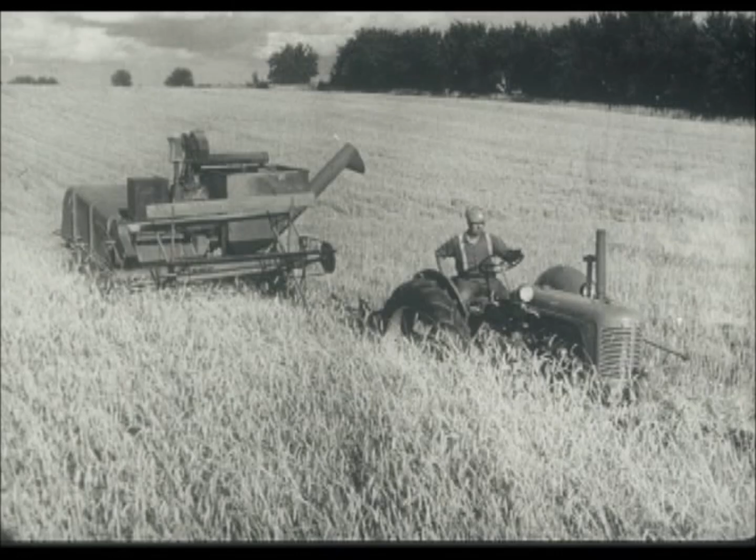A bumper crop and a good job of combining - that's the kind of harvest every farmer should have every year in every threshable crop. That kind of harvest means clean grain in the bag or bin, a quick harvest free from crop-wasting delay. It means high-testing grains or seeds, top market price, bigger returns with lower harvesting costs. Good harvesting begins for you when the right size and type of combine arrives at your farm.

This 6-foot machine is designed for heavy service. It's a model that has set a record for outstanding performance in harvest fields around the world. Your dealer or his specially trained serviceman can show you how to get the same performance for every threshable crop on your farm, whether you're a threshing expert or not.

When your combine is delivered, your dealer will ask you to sign the dealer's combine delivery service report. It serves as a checklist for him and as assurance to you that he has done a thorough job of pre-delivery service. This instruction book will answer all your questions once your dealer has acquainted you with a few basic facts and how to apply them.

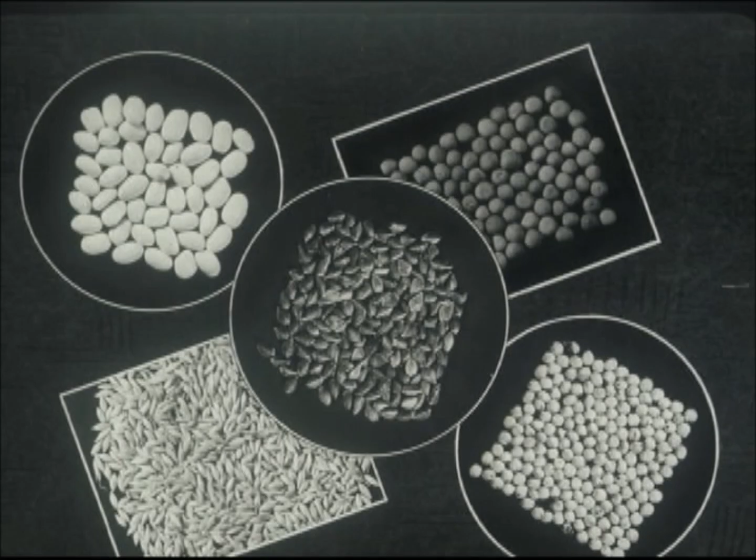Seeds in every size, weight, and every type of head or pod have been harvested by this machine from more crops than you'd imagine - short and tall, bushy and slender. Most threshable crops the world over can be divided into 7 groups. If you know how to handle one of each, you can handle them all, whether the total number is 10 or 100. First, we have regular grains: wheat, barley, oats, rye.

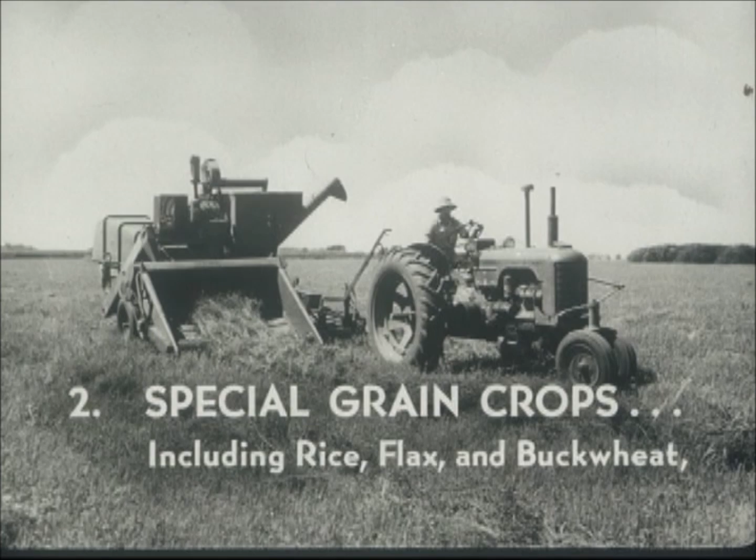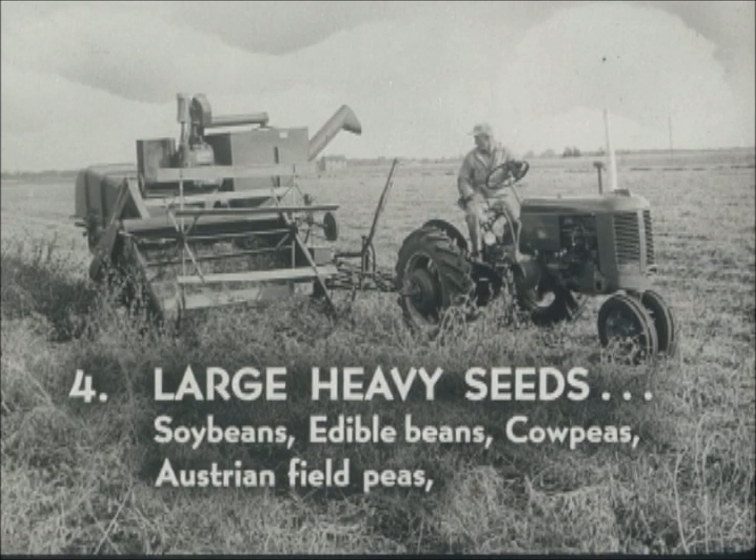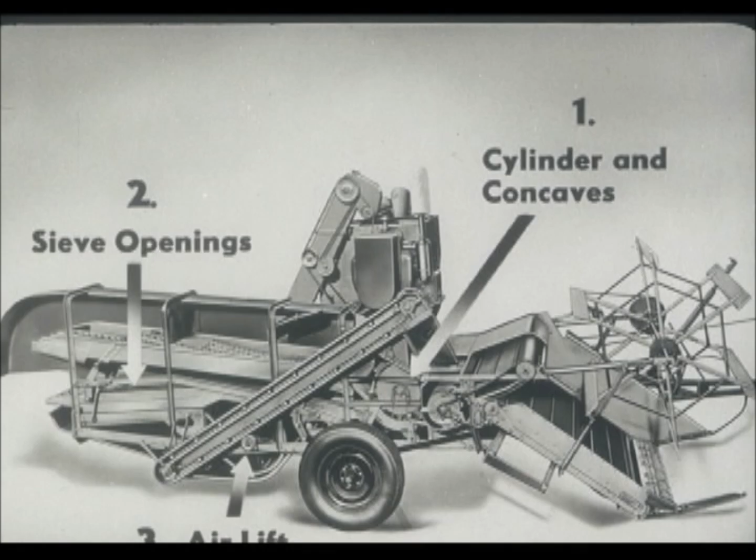3 major adjustments to the combine provide the basic setting for all 7 groups of threshable crops. These major adjustments are: one, the cylinder and concaves; two, the sieve openings; and three, the air lift from the fan. Your dealer can show you each of these 3 adjustments. They are simple to make, easy to understand.

Cylinder and concaves are adjusted here. Check the manual for suggested cylinder speeds for the crop to be harvested. With the cylinder running at the correct speed and the proper number of concaves in place, threshing action can be increased or decreased by raising or lowering the concave. Adjusted with a single lever, this will usually take care of variations in crop conditions during the day.

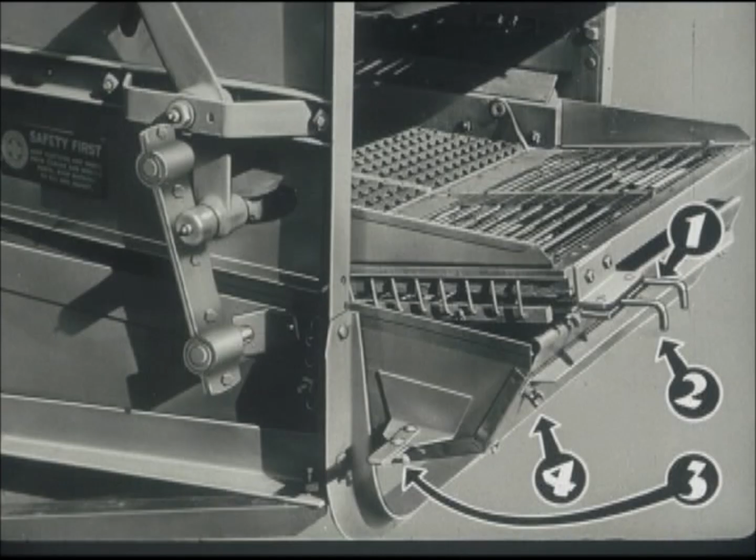3 small levers control sieve openings to accommodate various sizes and shapes of seeds. The wing nut at 4 controls the position of the tailboard. The volume of air, and thus the airlift on the sieves, is controlled by blinds on each end of the fan housing. These blinds can be individually adjusted.

Remember, just 3 major adjustments for the 7 groups of threshable crops. With these in mind, you can roughly fit your combine to the crop before you leave the barnyard.

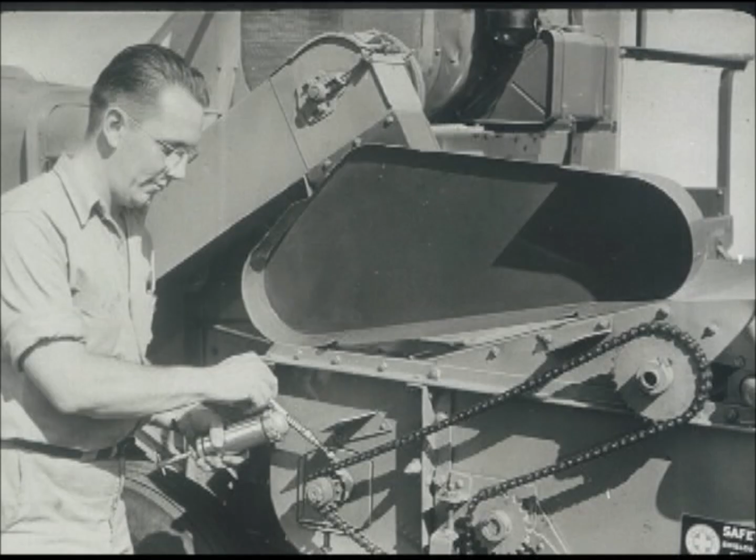After the main adjustment, thoroughly lubricate every grease fitting and oiling point on either a new or older combine before you take it to the harvest field. And then, run it in, starting at reduced speed until you're sure every part is working smoothly, then running at full speed for a few minutes.

Out in the field, you'll be off to a good start if you've had your dealer or his serviceman go along to be sure the combine is harvesting as it should. After cutting a short distance, stop the machine and check the quality of work in 3 places: in the bin or bag, at the tailings elevator, and in the threshed straw.

Suppose you were harvesting small seed and found this unusually bad condition: chaff, dirt, and stems, or straw in the bin or bag. This indicates excessive threshing, which overloads the sieves with straw particles, or sieve openings too wide, or not enough air.

Or all three conditions. Unthreshed heads of grain or seed pods in the bin or bag indicate incomplete threshing and improper sieve adjustment, which fails to return all tailings for rethreshing.

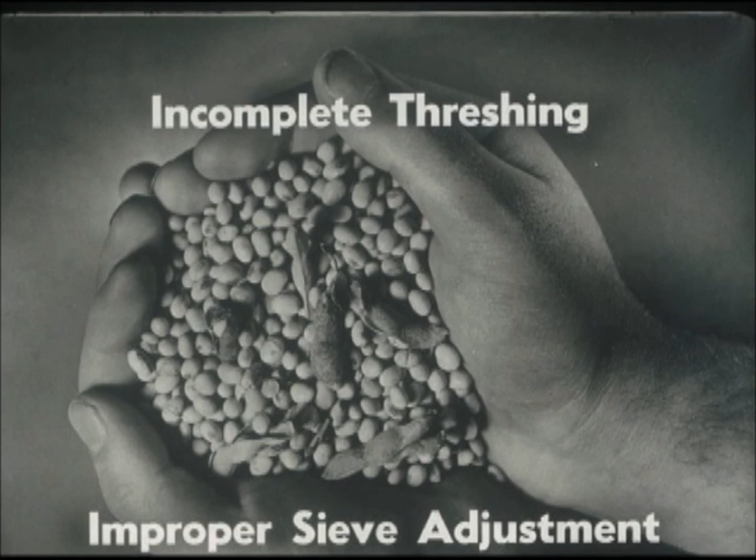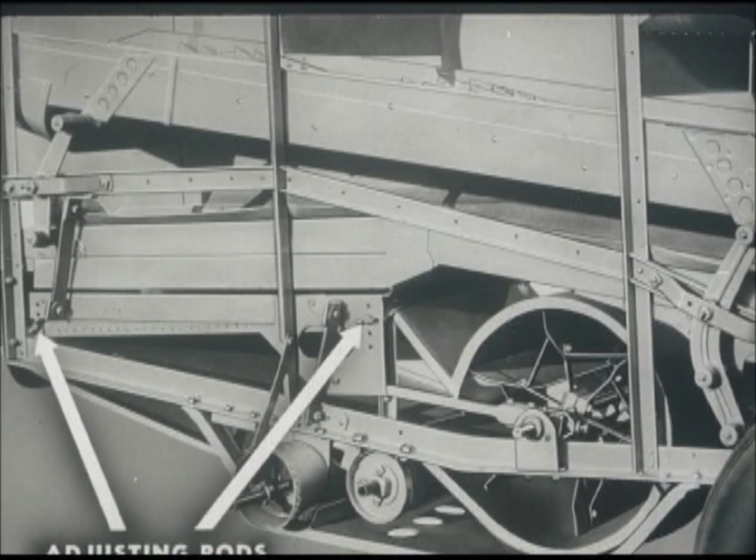If more than a trace of threshed seed is found in the tailings, adjust the sieves to let all seed pass through and increase the airlift. If this doesn't work, try the following adjustment: lower the rear end of the shoe sieve at the indicated point and set the openings to let the grain flow through more readily.

Reduce the cylinder speed or lower the concaves if you find cracked seed in the tailing. Also, in a used machine, check for centering or bent cylinder and concave teeth.

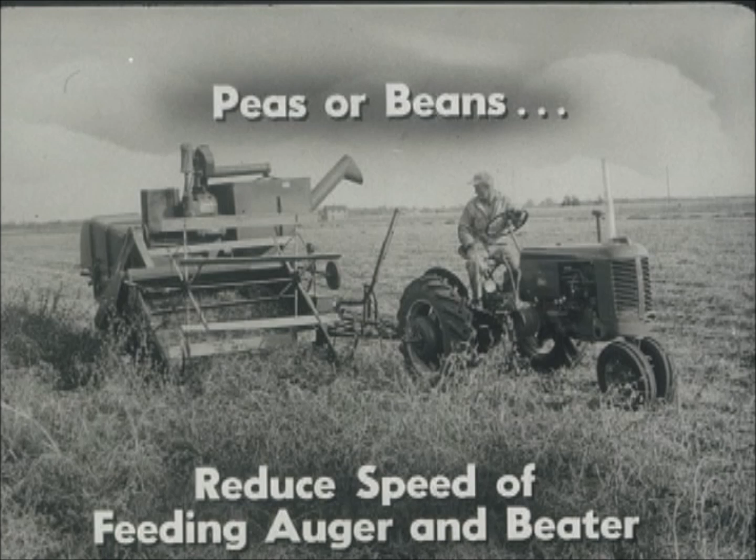If peas or beans are being threshed, you may have to use special sprockets to reduce the speed of the feeding auger and beater to eliminate the cracked seed condition.

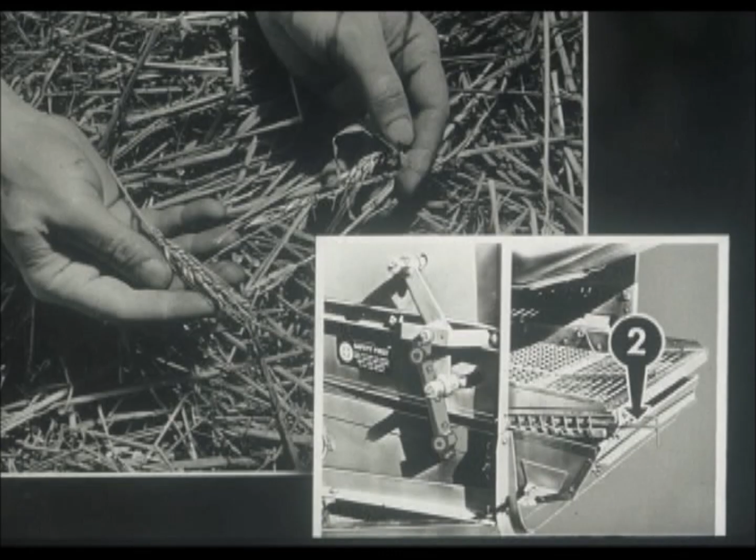In checking the straw as it comes from the combine, look first for unthreshed heads. If only a few are found and they appear to be coming from the chaffer sieve, it may indicate improper adjustment of the chaffer extension at 2.

On the other hand, many unthreshed heads in the straw indicate too little threshing action. To correct this condition, check for the correct cylinder speed, raise the concaves, or add more concaves.

Look for threshed grain in the straw, too. But remember, it takes about 1 million wheat kernels to make a single bushel. To waste 1 bushel every 10 hours, a combine has to throw over 1,600 kernels a minute.

But if excessive loss is indicated, if the straw appears to be over-threshed, be sure the cylinder speed is correct, as indicated in the operator's manual. Remove some of the concaves or lower the concaves.

If grain is found in the chaff as it falls from the machine, open the sieve or increase the airlift, or do both. If grain or seed is being blown over, reduce the airlift.

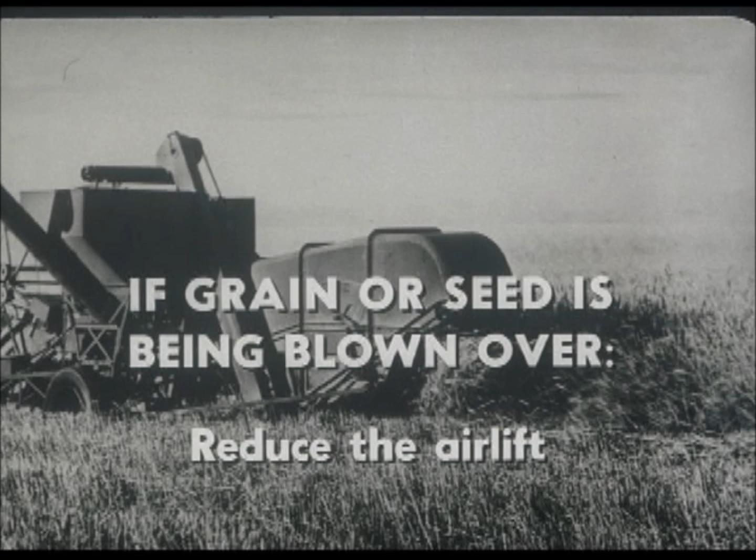Now, remember the 3 major adjustments. They are, first, the cylinders and concaves, second, the sieve openings, and third, the airlift.

After your dealer has helped you off to the right start, any further adjustments can be quickly made by remembering his suggestions and by referring to your operator's manual.

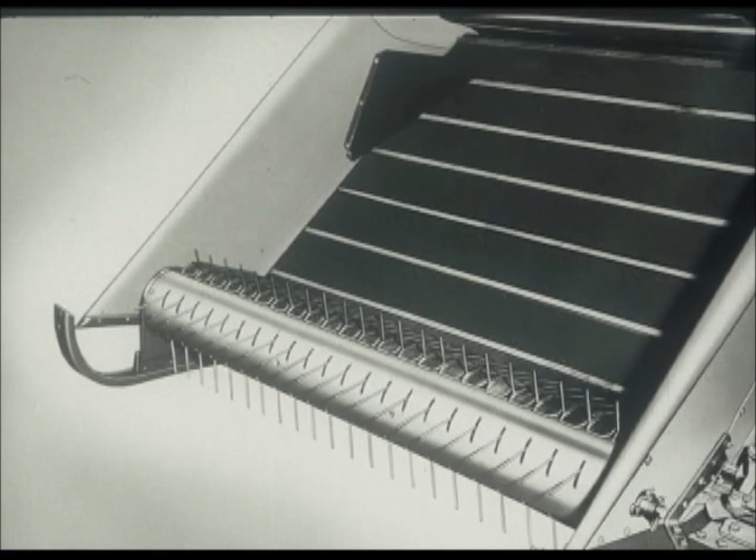Under certain conditions, the use of special attachments, such as the windrow pickup, may increase harvesting efficiency. The pickup attachment permits windrowing the crop ahead of the combine to simplify the handling of straw or vines which are still green when the seed is ready to harvest.

Other advantages are when the crop is infested or threatened with green weeds, when the crop ripens unevenly, when insects or disease may damage the crop if it is left standing, when the grain nurse crop can't be cut high enough to miss the green hay or grass crop.

Other special attachments remove weed seeds, spread straw, and aid in the harvesting of certain groups of crops. Your dealer can advise you concerning those useful in your locality.

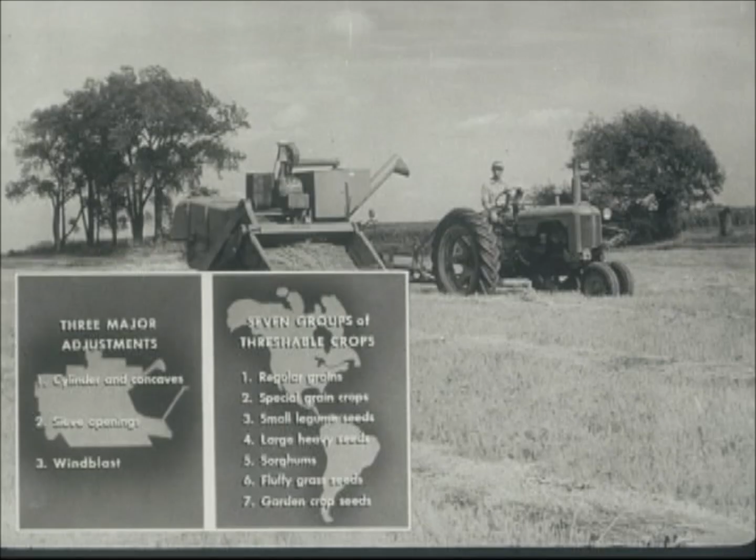Whatever equipment you may use, the same basic adjustments still apply to all 7 groups of threshable crops. They are the key to outstanding combine performance from the start of the harvest season until the last bushel is in the bin or bag.

Equally important is proper lubrication and alert maintenance. Take care of your combine, and it will take care of you. Follow your instruction book consistently. Read it again before every new harvest season.

Be sure that every fitting is lubricated on schedule. Keep the sickle and guards in good cutting condition. Remove the header canvas when the combine will be exposed to rain, snow, or fog.

Be alert for loose bolts, missing grease fittings, and cotter keys. Maintain the proper tension on drive belts and chains. A few extra minutes of care may save hours of delay.

Finally, when the harvest is over, bring in your combine promptly. Store it in a rain-tight implement shed following the instruction book for proper storage of belts, canvases, and cutting parts.

Know your combine. Know how to operate it right. Then for good harvesting every season, in every threshable crop, you'll be ready for Operation Combine.

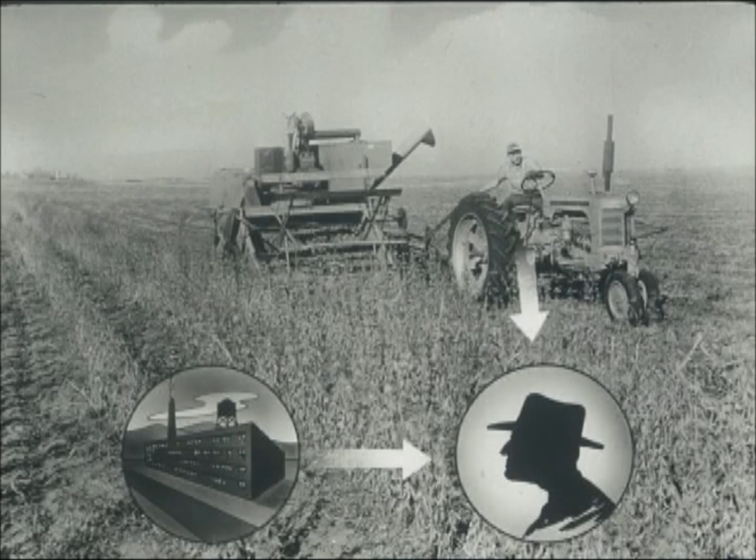Modern combines are designed to do a job. Even though the design is the result of years of field testing around the world, the performance of each machine depends largely on the dealer who sells it. Both the farmer and the manufacturer depend on the dealer to get each new combine started right.

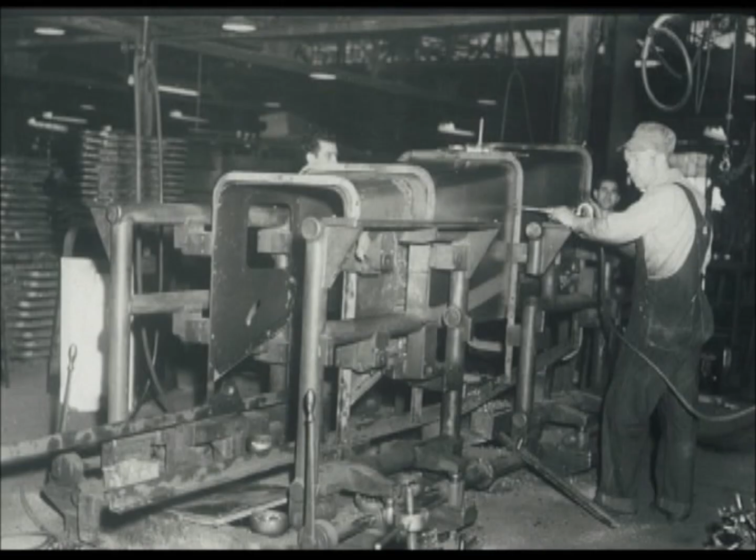It's the dealer who unloads the machine, sets it up, runs it in, and delivers it to the farmer with proper instructions. If he has done this job right, he'll have a satisfied customer who'll buy again and tell his neighbors. Supporting the dealer's efforts, the J.I. Case Company manufactures each unit with skill and care, from accurate alignment and assembly of the combine frame at the start to the completed unit at the other end of the assembly line.

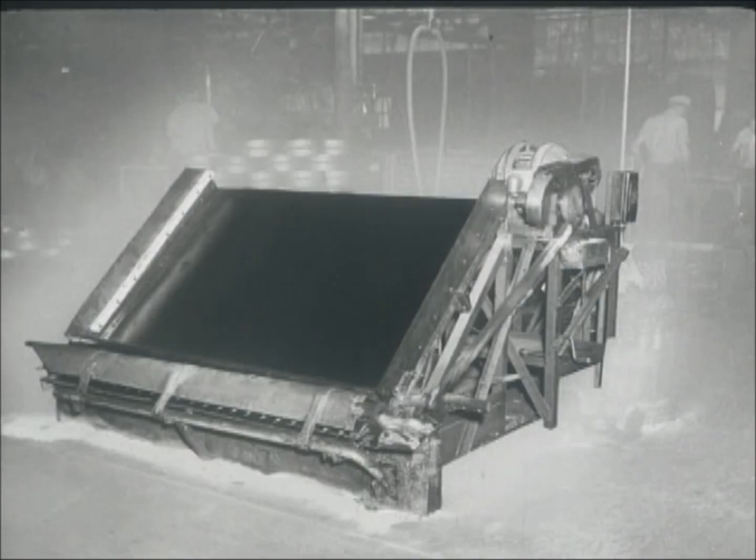But before final assembly, the machine is carefully tested in 3 separate units. Sickle and pitman are run in separately to assure smooth performance from the first round on, because good harvesting begins with clean cutting. The feeding auger gets a separate workout, further assurance of smooth operation and proper alignment of bearings and shafts, further assurance of performance in the field.

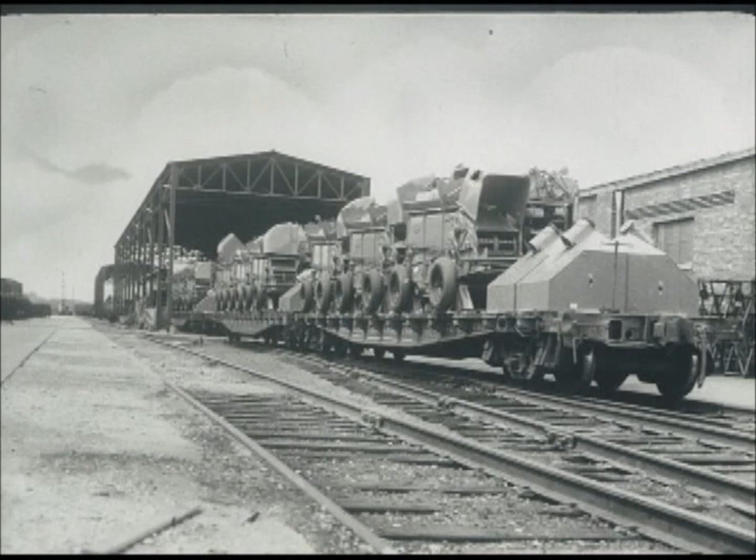Securely loaded, finished combines are ready to travel. Destination? Anywhere in the world. Destination? Your depot, perhaps. Each of these combines has been soundly engineered and built of the best materials. Each can do a job for your customer, but only if you do your job first.

As the car is unloaded, use a check sheet to make certain every machine is complete as ordered and shipped. Then follow these 5 steps.

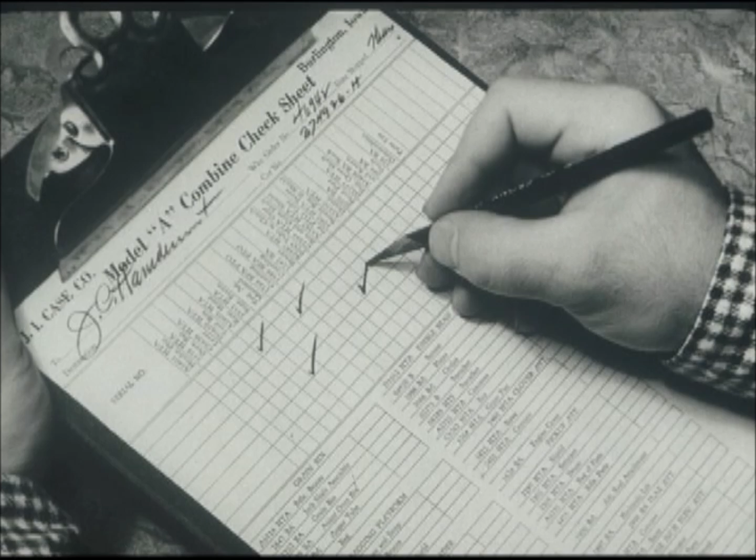One, unload each machine carefully. Two, set it up correctly. Three, run it in at reduced speed. Four, deliver it in the field properly adjusted. And five, thoroughly instruct the operator. Following this procedure assures superior field performance from each combine.

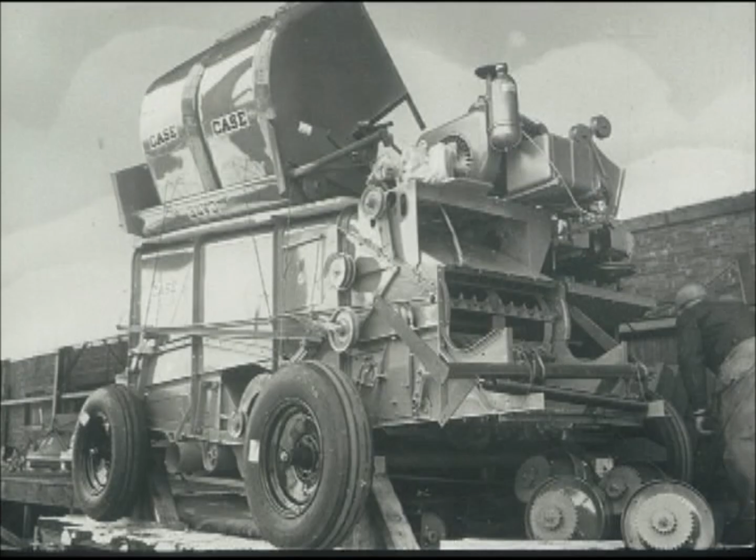Now, what do you do to unload each machine carefully? That's the first step. After removing the loose parts, remove the blocks from underneath the axles. Some dealers use a jack to lift the combine just enough to let them knock out the blocks sideways. Use a power crane for unloading if you need to, and one is available, but be sure the rigger knows his business.

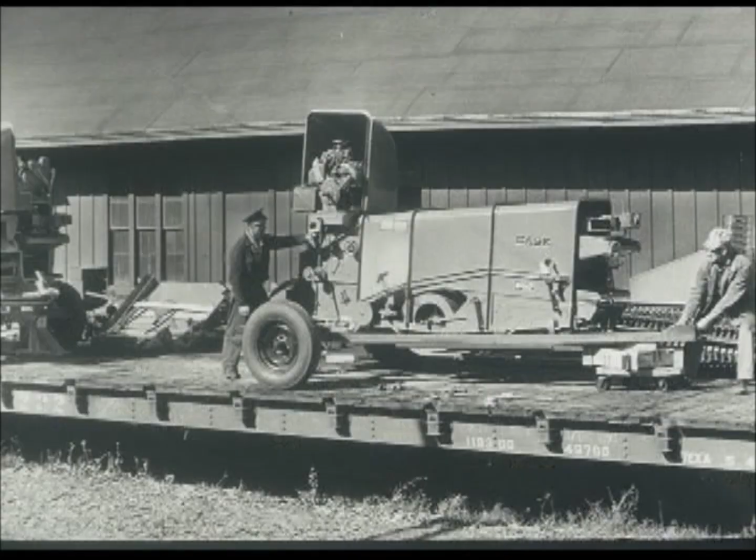Or roll it off the car, using a temporary tongue if the machine is faced toward the rear. There are a lot of practical ways to do the job. Just be sure to follow safe practice.

Use the same temporary tongue to tow the machine to the store if you like. It's safe for miles of travel. And safe arrival at the store means that step number 1 has been completed. The combine has been carefully unloaded.

Next, set it up correctly. That's step 2, assembling the combine, which was shipped knocked down to lower your shipping costs. The dealer's combine delivery service report, which includes pre-delivery inspection, will serve as a check on the setting up operation.

Spot the main unit in the center of a clear area, indoors or out, preferably on a smooth floor to prevent loss of small parts and to provide level footing for supports. In assembling, use the following order.

First, the feeding auger assembly. Second, basket structure. Third, drawbar. Fourth, header. Fifth, reel. Sixth, cross shaft and drives. And seventh, grain bin or bagging platform and any special attachments.

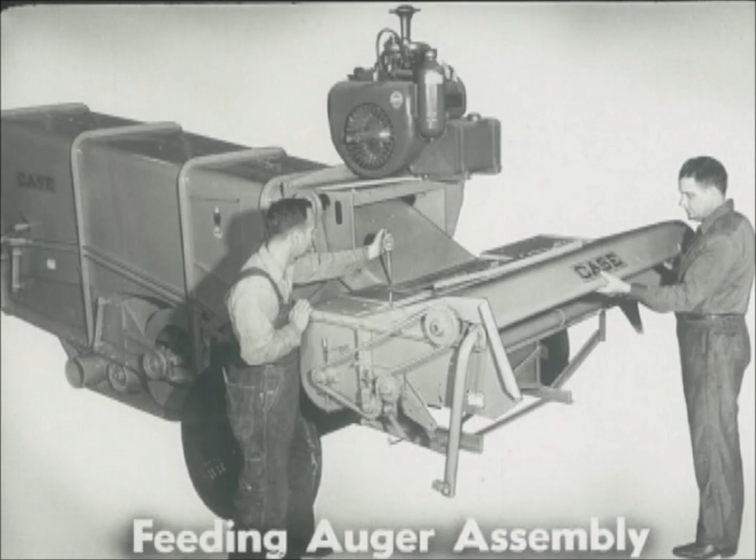First, set the feeding auger assembly in place. Bolts holding the trough must be placed with heads inside. When you replace the stripper plate, be sure to bolt it angle down between the top of the header auger trough and the front of the hood. So placed, it prevents loss of light grains and seeds, creating a suction to draw material into the cylinder and concaves.

When properly installed, bolt heads and feeder floor extension are positioned as shown by the sketches. The hinged extension on the underside of the feeder floor rests on the upper edge of the concave.

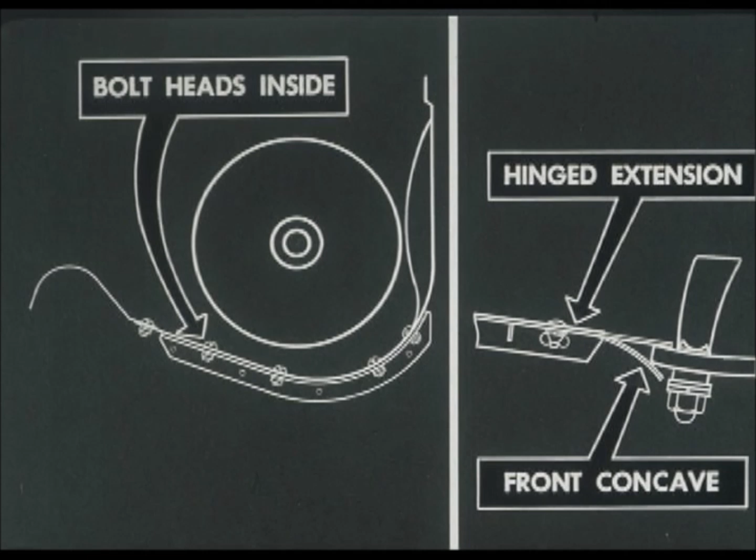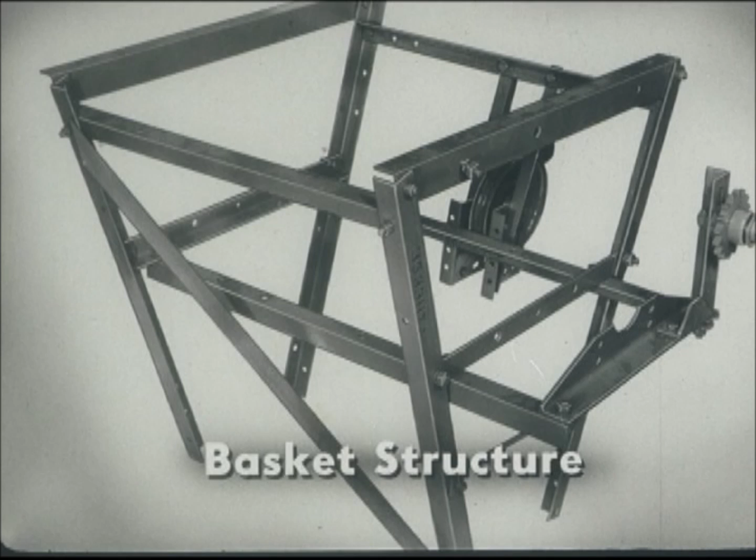Next is the basket structure. This assembly supports the cross shaft, grain bin, and upper part of the drawbar. Reassemble the mounting bracket for the cylinder drive chain tightener so the tightener is outside the basket structure. And here's a tip: when the basket structure is set over the axle, leave all bolts loose until the last one is in place. Alignment is easier this way.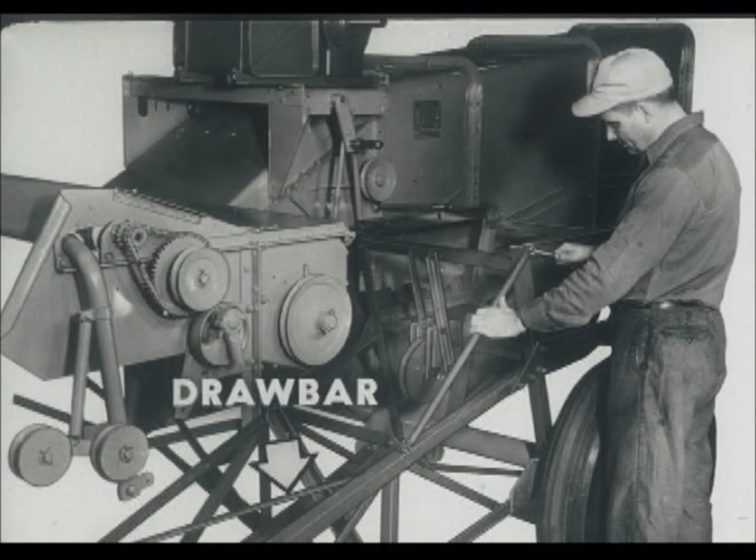The header auger is aligned by tightening the brace. Merely place in position, then tighten and adjust after the power cross shaft is installed. Bolt the drawbar to the axle and basket structure, being sure to attach all braces and cross pieces to assure maximum rigidity for rough harvesting conditions.

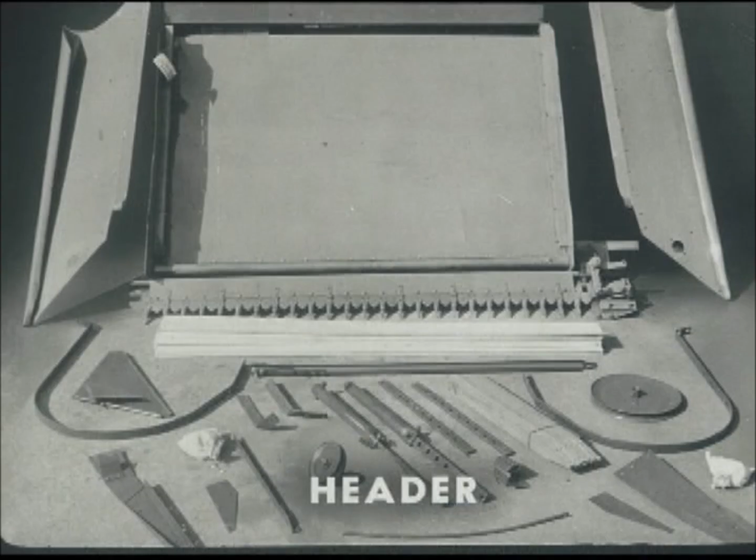Completely assemble all the header parts before attaching the header to the combine. This is a must.

Next, attach the upper ends of the hook dividers with spacers in the slots. Then bolt the platform extension sheet and cross angle at the upper end of the header.

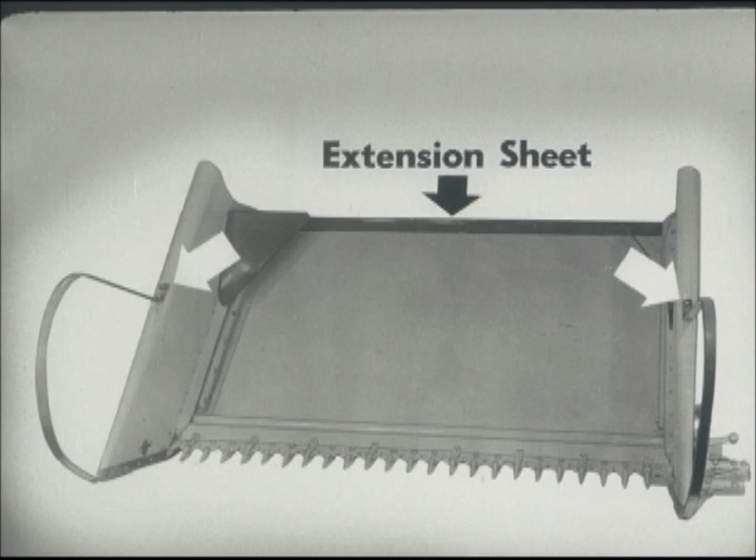The header balance arms are bolted to the main frame with U-bolts. The header balance springs hook to the balance arms and are left free at the rear end until after the header is installed.

Attach the header assembly with the hinge brackets and connect the lift links. The balance springs are adjusted later.

When installing the pitman, adjust its length to obtain correct sickle register. Then tighten the hex nut securely against the sickle crank bearing housing. Register is correct when the sections pass equal distance through the adjacent guards at the ends of the pitman stroke.

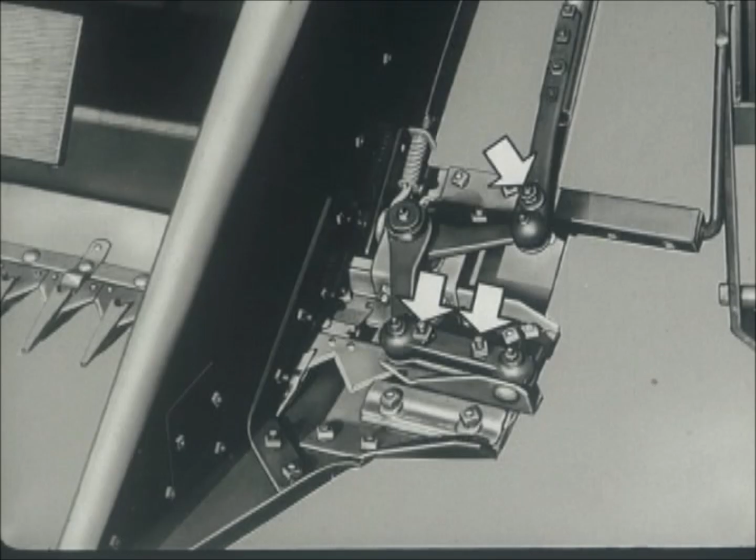Tighten the pitman bearing bolts to keep the bearing snug, but not so tight that the linkage will bind. All other bolts must be drawn tight.

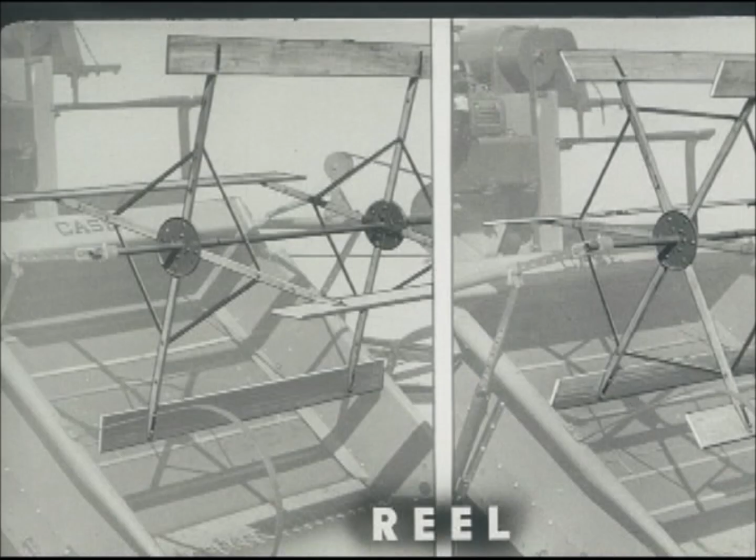Next, assemble the reel, complete with bearings and arms, and slip into place. Combine reels may have either 3, 4, or 6 bats, depending on crop conditions. A V-belt drives the reel.

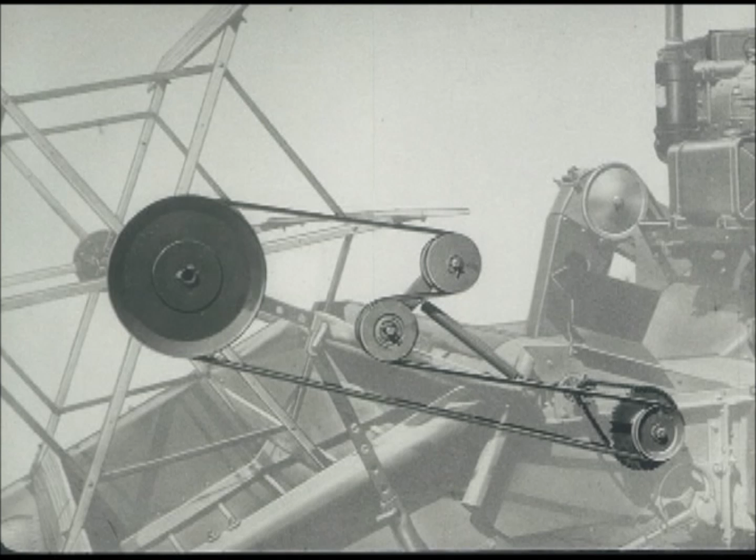Tighten the spring only enough to drive the reel under ordinary conditions. A larger reel sheave is available to provide slower reel speeds to match slow ground speeds in cutting heavy crops.

The roller chain drive has a reversible sprocket to give 2 reel speeds. The shield for this drive and all shields on the combine must be in place before the combine is operated.

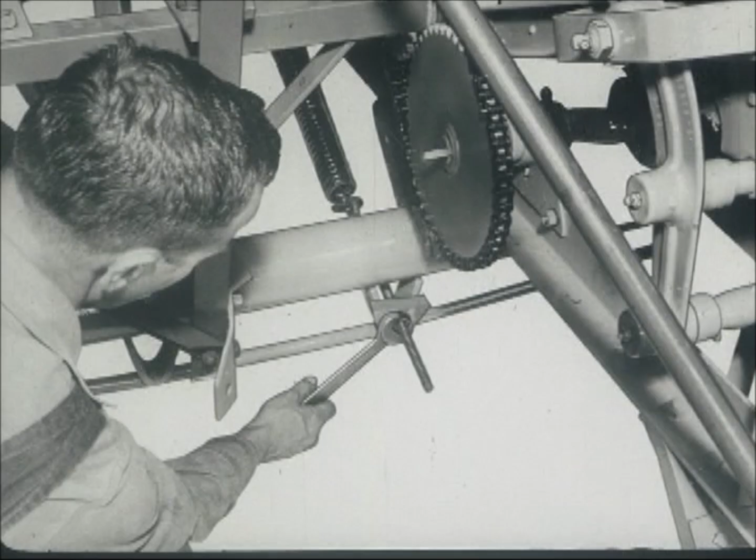After attaching the balance springs, balance the header by adjusting the tension of each spring. Check the tension by installing the lift lever and testing.

Connecting the header lift link with the upper cross bolt in the top position A allows the header to float up and down with the irregularity of the ground. Moving the bolt to a lower hole B checks this floating action.

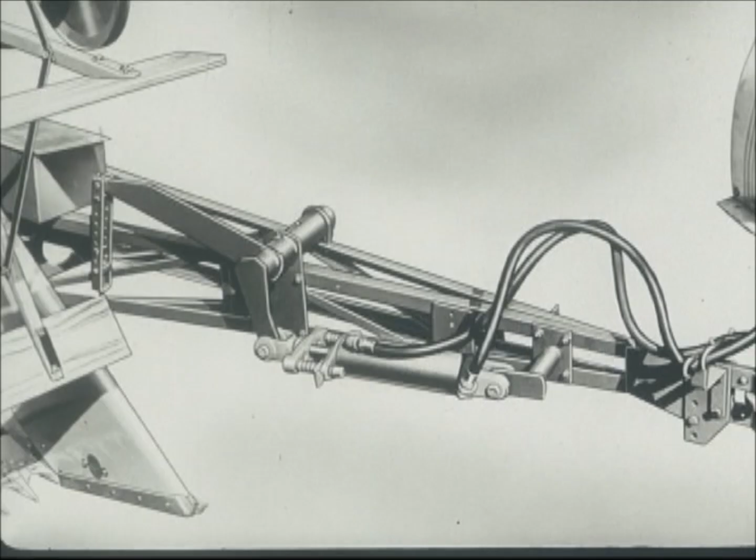When tractors are equipped with hydraulic systems capable of operating remote cylinders, a hydraulic header control can be installed on the combine. Controlled by a lever from the tractor seat, this system assures quick raising or lowering of the header.

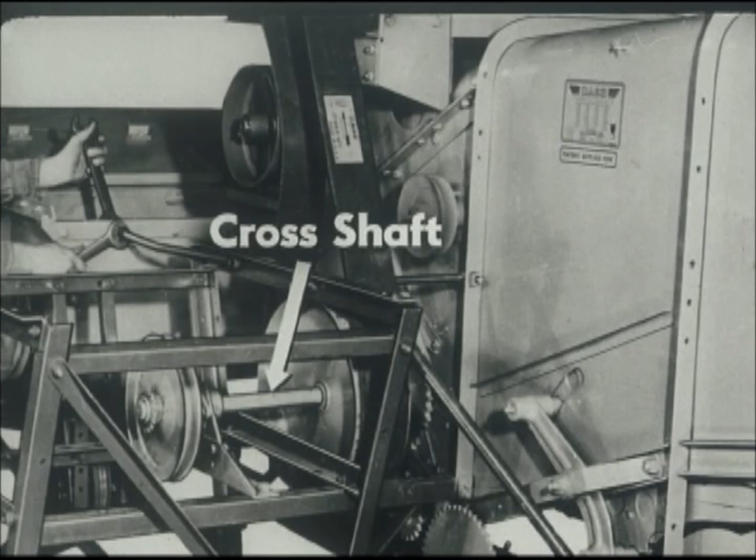Next, install the power cross shaft from which the combine is driven. Place the flat belt on the cross shaft pulley before bolting the shaft bearings in place. With the shaft in place, tighten the brace to the auger trough.

Then install the grain bin jack shaft, leveling by means of the slotted holes in the support brackets. These slots also permit belt tightening.

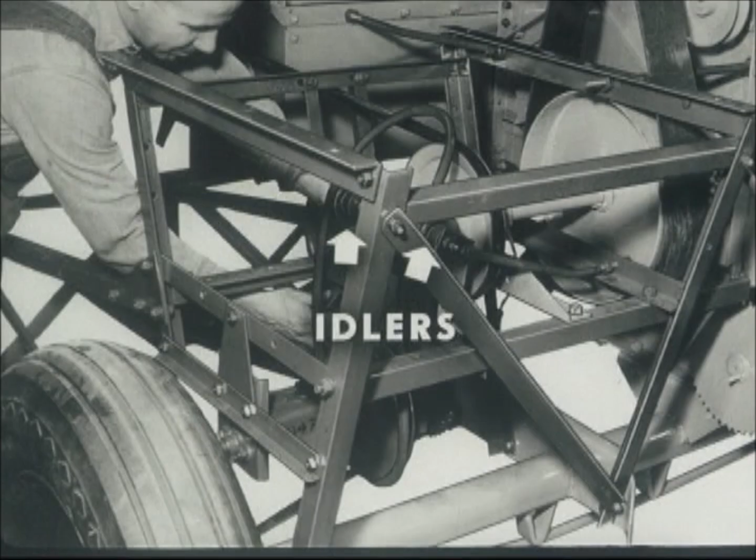The front and rear idler assemblies align the belt on the discharge auger sheave.

Inspect alignment of: 1, the chain to the grain bin jack shaft; 2, the V-belt to the header auger; 3, the flat belt to the engine; 4, the chain to the cylinder; and 5, the chain to the straw rack crankshaft.

Now tighten all the bolts in the basket structure.

Next, check the engine for dirt in the air passages by removing the cleanout plates. Fill the engine with the proper grade of oil, and then install the air cleaner breather pipe, being sure to remove the cork from the inlet pipe on the engine.

To install the engine drive throwout and throttle control, first attach the pivot pipe assembly. Then connect the governor control linkage and the engine throwout tightener.

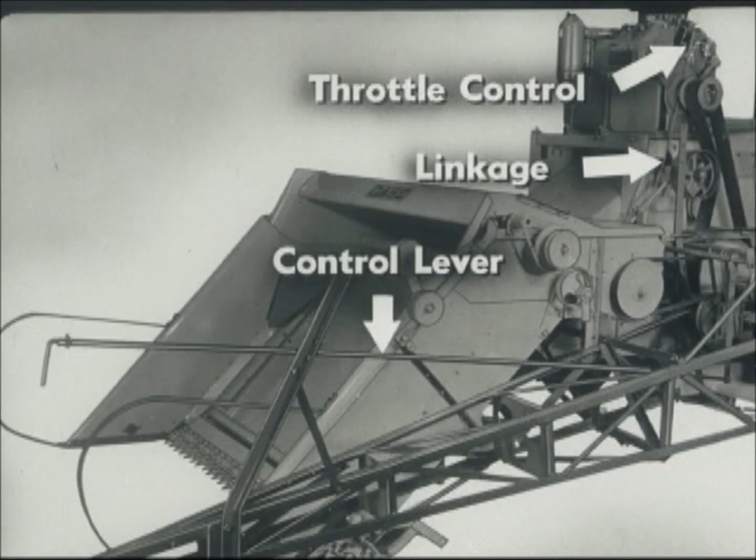Adjust the throttle control and attach linkage to the engine drive tightener. Adjust the length of the control lever for convenient operation from the tractor seat.

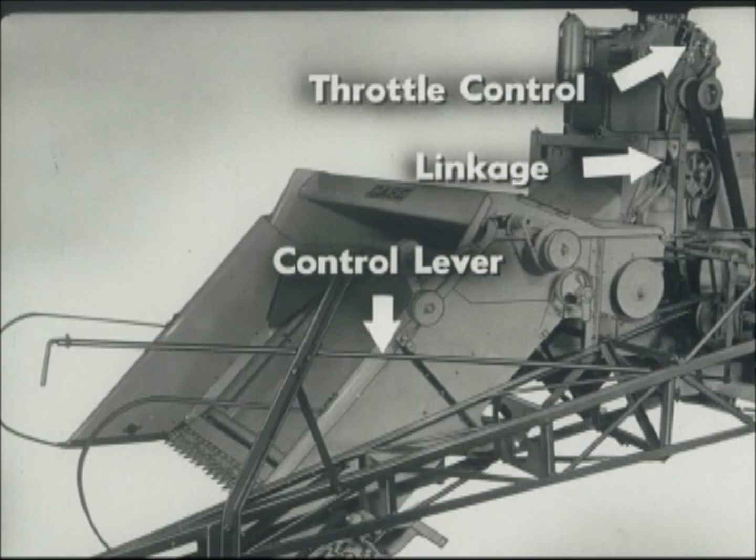Before keying the pulley on the engine, adjust the working alignment of the idler pulley by shifting the bearing on the right-hand end of the engine throwout shaft until the belt runs true.

Install the unloading auger drive and carry the throwout ropes to the drawbar.

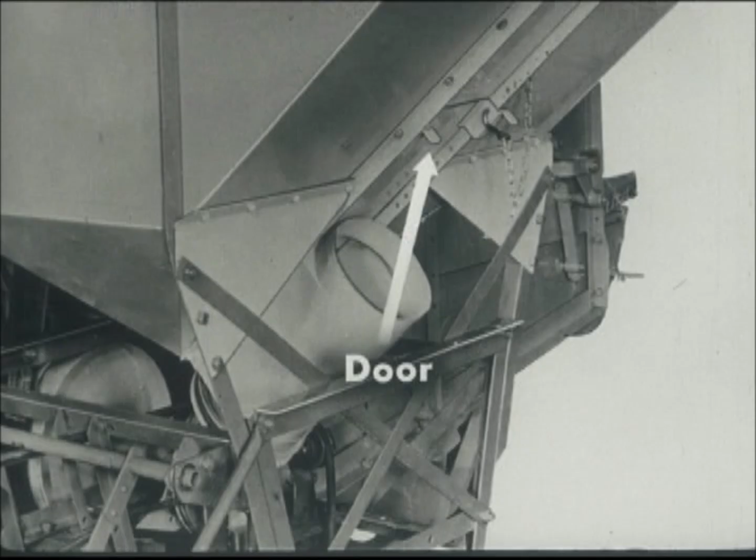Before mounting the grain bin, check the sliding door at the bottom to be sure it moves freely. Then mount the bin and connect the unloading drive belt.

When placing augers in the auger troughs, check the alignment in the bearing caps.

Attach the elevators to the auger troughs. The elevator chain has a connecting link which is pinned when attached.

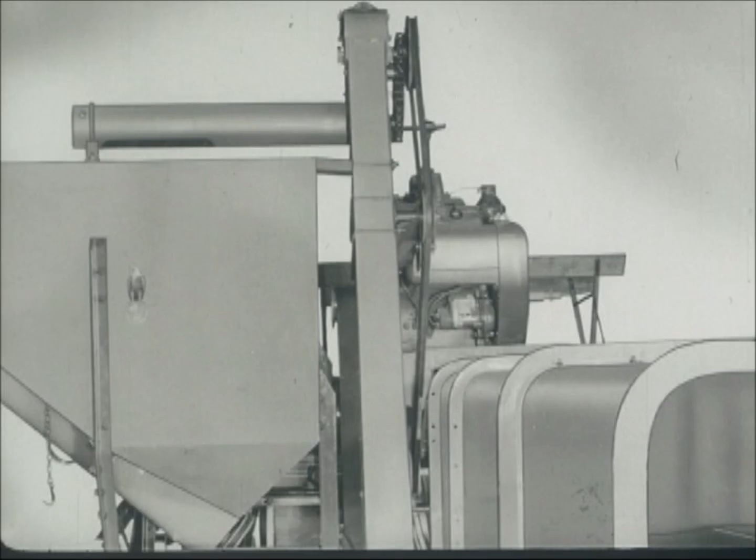With the grain bin in place, install the grain elevator and drive. Then adjust the tension of the elevator chain.

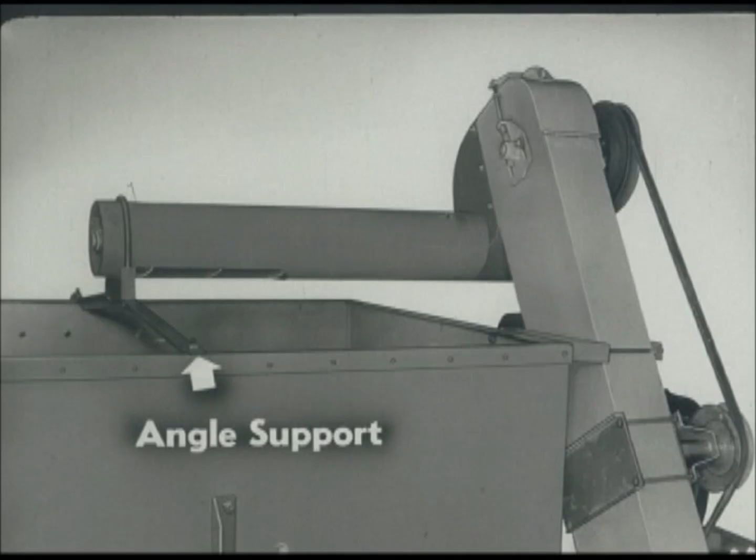The grain bin distributor auger is mounted on an angle support placed across the grain bin. Install the tightener for the elevator drive belt with a flat grooved sheave to the front, as the back of the V-belt runs on this sheave. Also tighten the drive chain of the distributor auger.

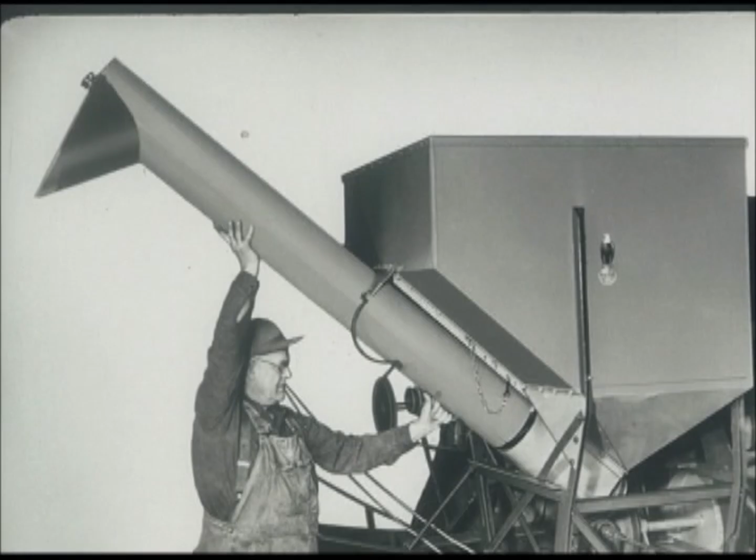Now slide the grain bin unloading auger into place and attach with a support bracket. The sliding door must be opened so as to feed the unloading auger. Use it to close the bin so that the unloading auger can be removed and the combine operated without loss of grain. This is an aid when operating close to buildings, fences, or trees.

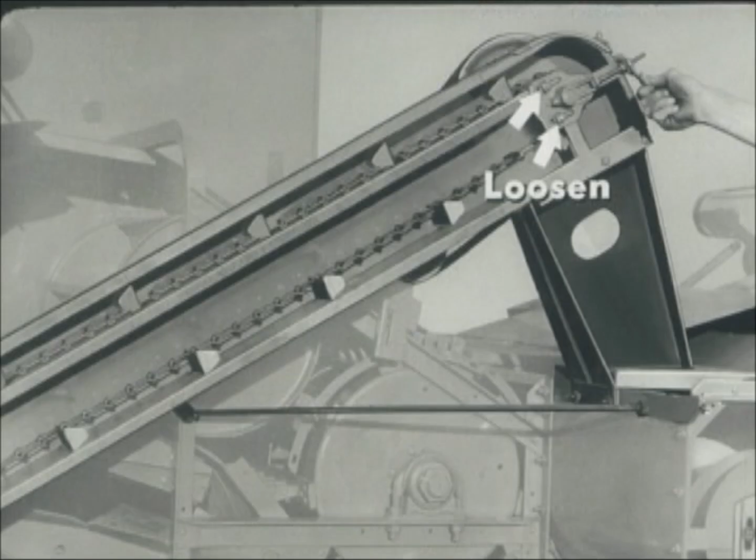To adjust the tailings return elevator chain, first loosen the side bolts. Then take up any slack by turning the adjusting bolt. Retighten the side bolts and readjust the elevator drive belt.

After the combine is completely assembled, carefully grease every fitting. And at the same time, check for loose grease fittings, missing bolts, braces, or wrong assembly. And now you're ready to run it in at reduced speed, the third step in getting the combine started right.

Let's study this order of assembly while the operator turns the record.

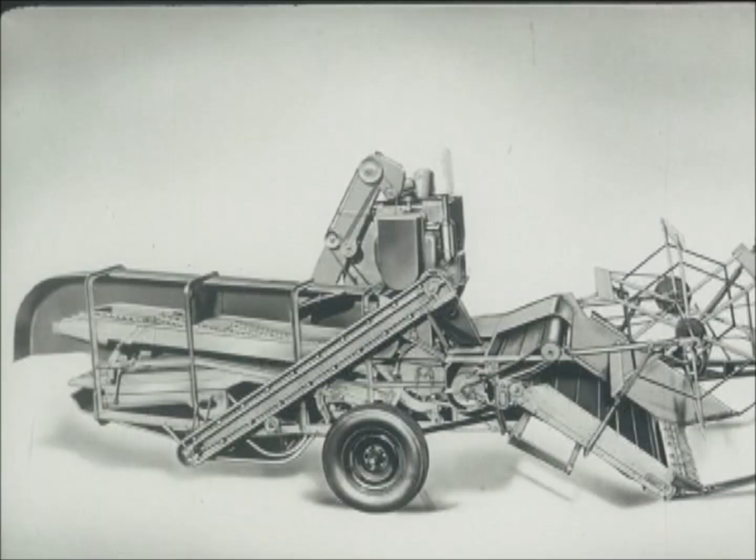Now that the machine is completely assembled, let's see just how each section operates. The operations can be divided into 5 parts. First, there's cutting and pickup. Second, feeding. Third, threshing. Fourth, separating. And fifth, cleaning and conveying.

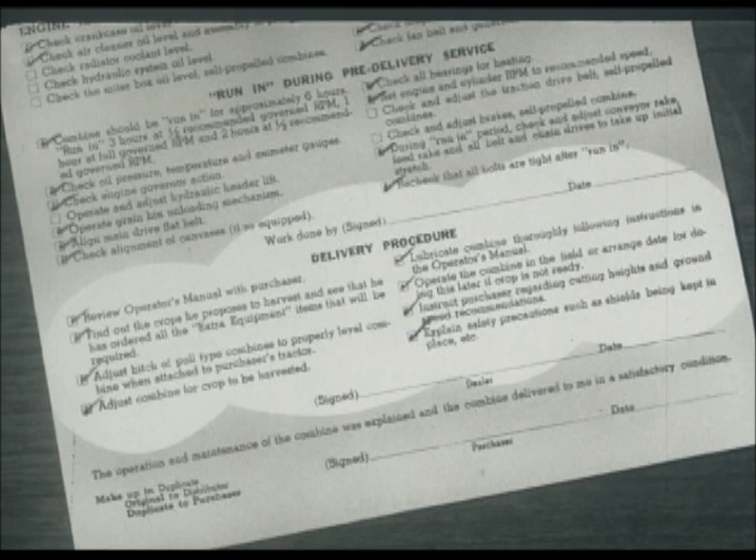Here's the cutting and pickup section, where trouble-free harvest begins, with smooth, clean cutting and a reel action which lays the grain back on the canvas in a wide, even mat. A crop which is cut right moves evenly and freely up the header canvas and feeds steadily back to the cylinder, for clean cutting in tangled crops.

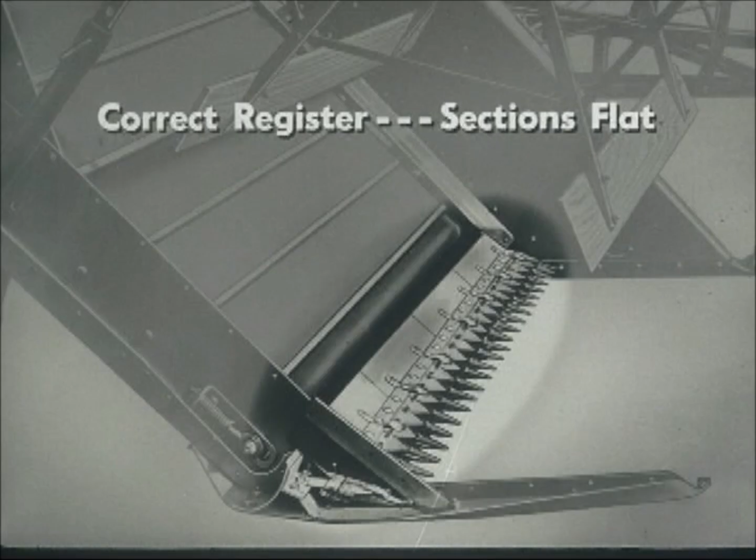Have the sickle in correct register and the sections lying flat on the ledger plates without pressure from the hold-down clips. Review the instructions for servicing the sickle given in the operator's manual. It is important that sections and guard plates be sharp and have proper shear contact.

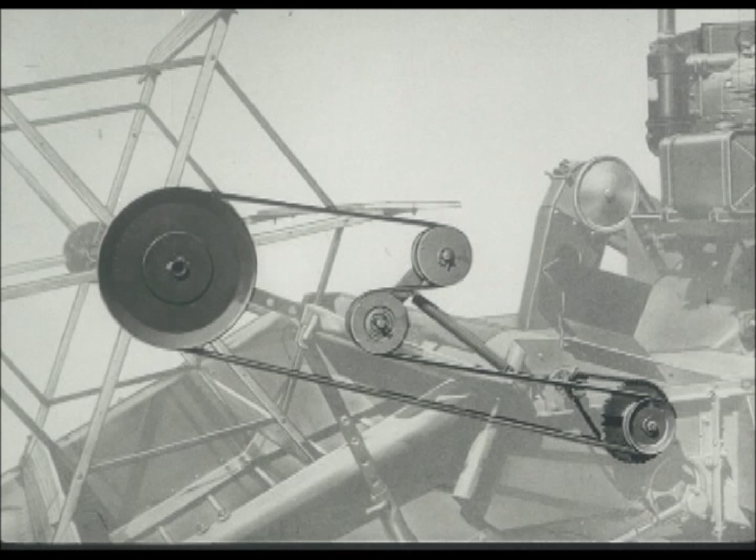The reel on this combine has a wide range of adjustments to meet every harvesting condition. The adjustment at 1 changes the reel position vertically in relation to the sickle and canvas, while the adjustment at 2 changes the reel position horizontally. And remember, there's a choice of 2 reel speeds through the quickly reversible sprocket on the reel drive.

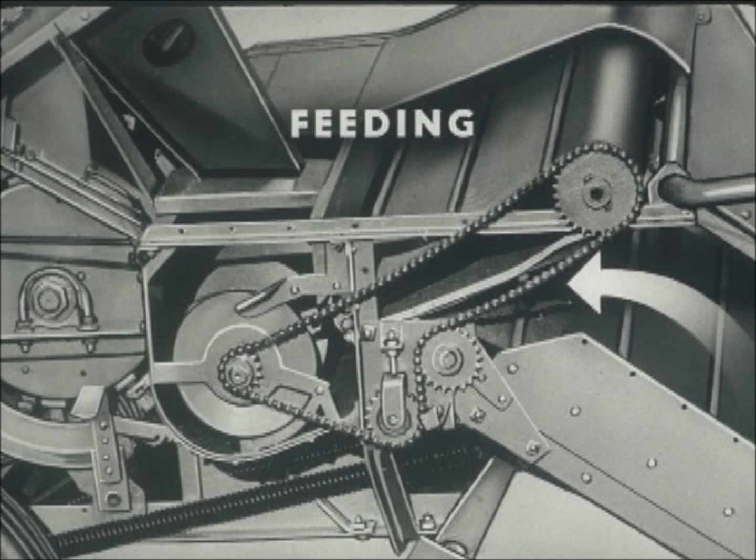Feeding is the second operation of the combine. This particular feeding mechanism is responsible for much of the outstanding performance which has made this combine so popular. The feeding auger tucks the grain or seed crop into cylinder width before feeding it to the cylinder.

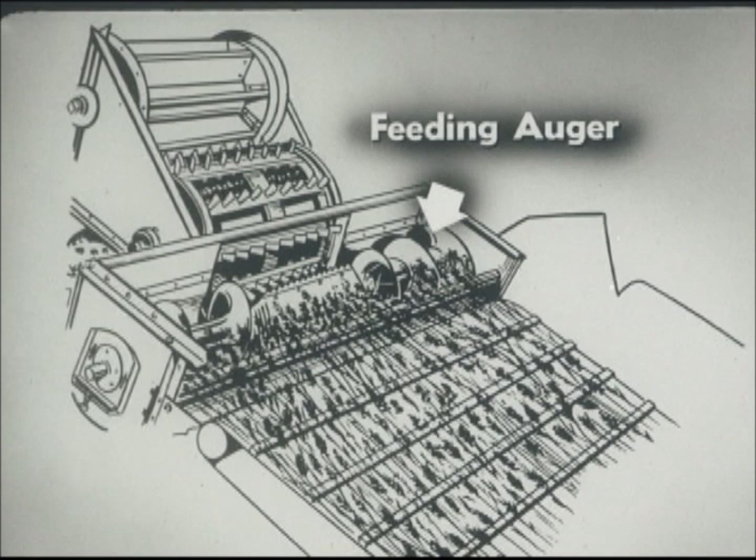Notice how the action of the feeding auger gives an even flow of grain across the whole cylinder width, even though the straw may be coming up the header in bunches. In windrow combining, this same action centers the windrow and smooths and flattens the material, feeding it to the cylinder in an even layer.

Threshing is the third operation. The spike-tooth cylinder gives a thorough threshing action, positively regulated by changing the number of concaves, by lowering or raising the concaves, by changing the cylinder speed between crops.

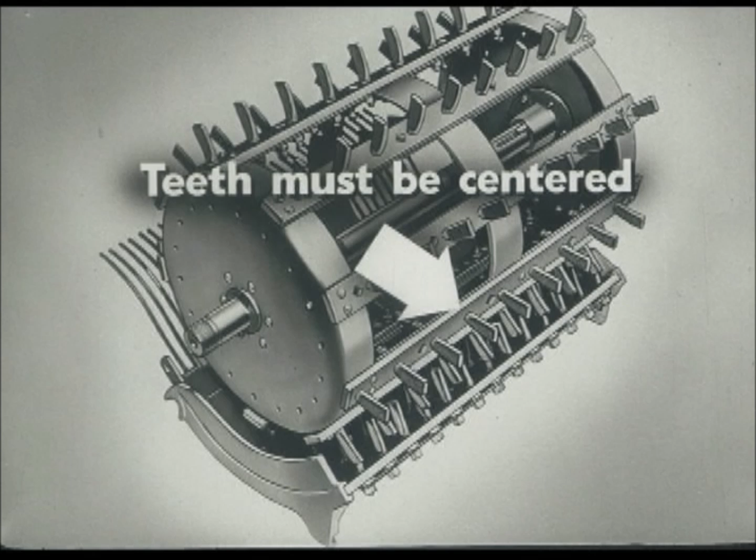Whether the concaves are set high or low, the cylinder teeth must be centered between the concave teeth on either side. Make this adjustment with the lock screws at 1 to move the concave sideways. For further alignment, shift the cylinder by loosening the bolts at 2. The eye bolts at 3 raise or lower the finger grates and rear of the concaves.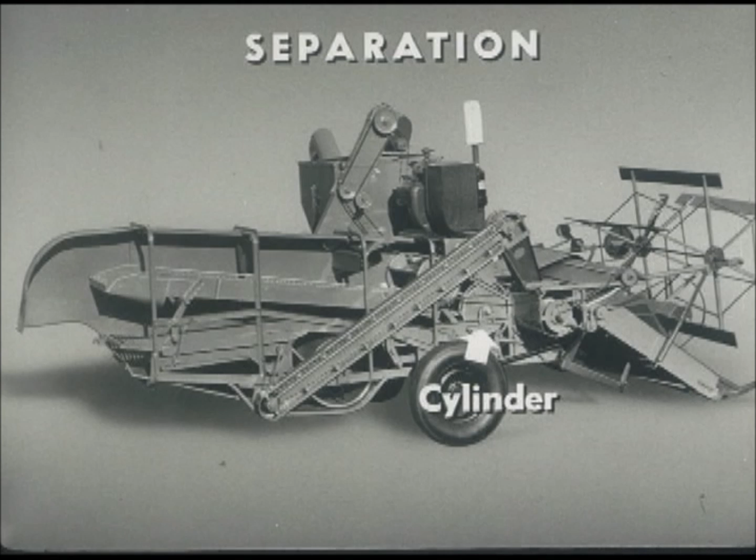Separation, the fourth step, starts at the cylinder through open finger grates. Just beyond them is the large beater, which deflects straw and flying kernels down to the straw rack for more than 10 feet of vigorous agitation to sift out grain and heads.

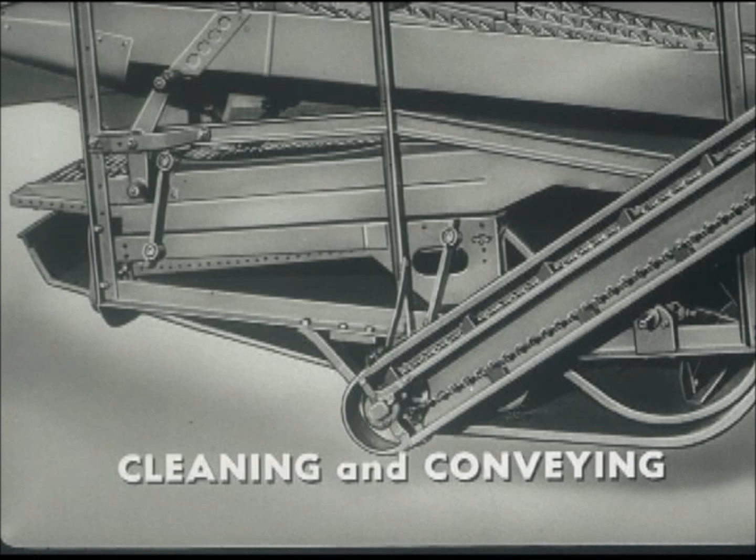Cleaning the grain and conveying it to bin or bag is the final operation. Good cleaning is the sign of a carefully adjusted machine. Three things are required: one, correct machine speed.

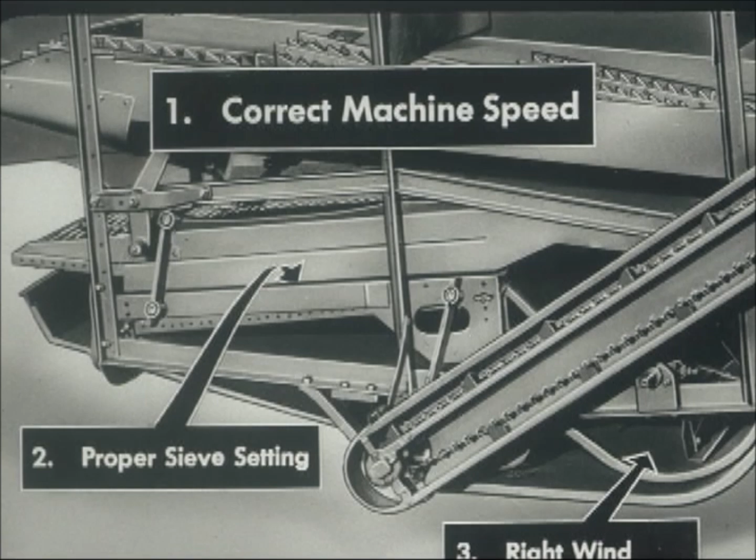Two, proper sieve setting, and three, the right wind for proper airlift. The main parts of this section are: one, the straw rack; two, the chaffer sieve; three, the chaffer extension; and

four, the shoe sieve. Case airlift cleaning employs an even flow of air which blows upward through the shoe and chaffer sieves to carry dust and chaff away as the clean grains fall downward toward the conveying augers.

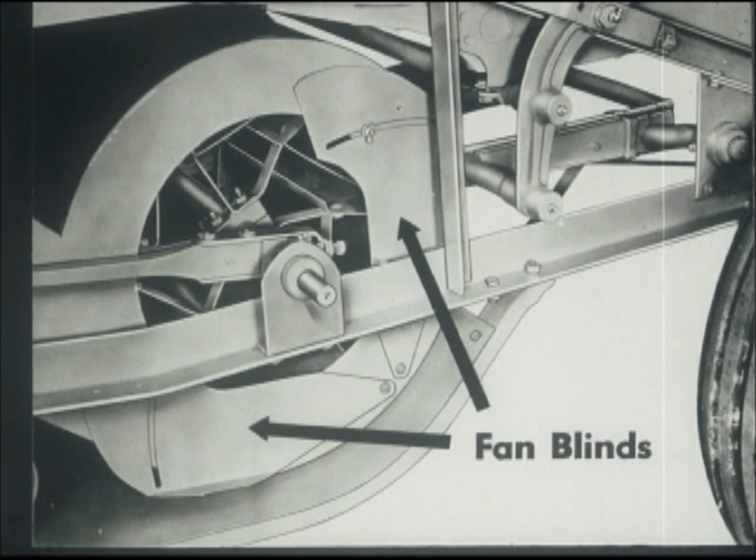The airflow is controlled by adjusting the fan blinds, one pair on each end of the fan housing. Remember, this adjustment affects the air pressure on the opposite side of the sieve and chaffer.

With a fan speed attachment, the operator can obtain the gentle airlift for small grain and light seed crops, and a stronger airlift for beans, peanuts, and other heavy crops.

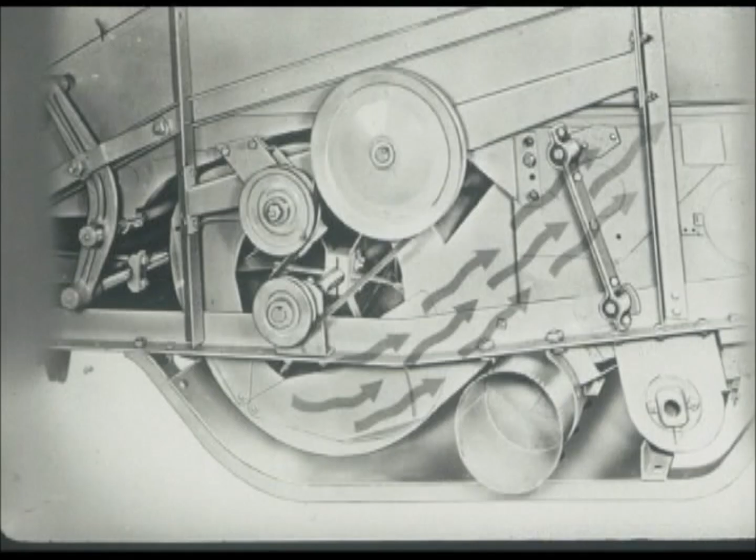The proper airlift from the fan ensures a thorough job of cleaning for all types of crops. It also prevents loss of seed over the sieves.

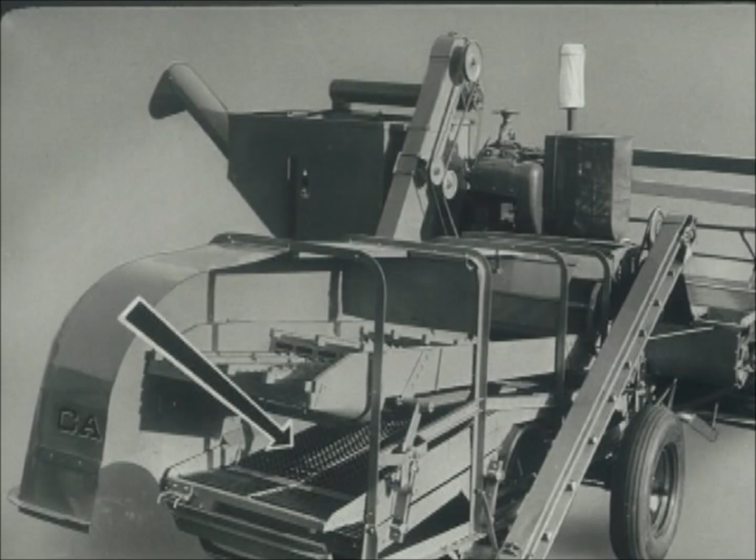The chaffer, or upper sieve, removes the coarser material from the mixture of grain, chaff, and straw particles. The openings are set wide enough so that all the grain or seed drops through, including some of the small

chaff particles. The chaffer extension catches any possible unthreshed heads or pods for return to the cylinder for rethreshing. Usually, the extension is opened wider than the chaffer.

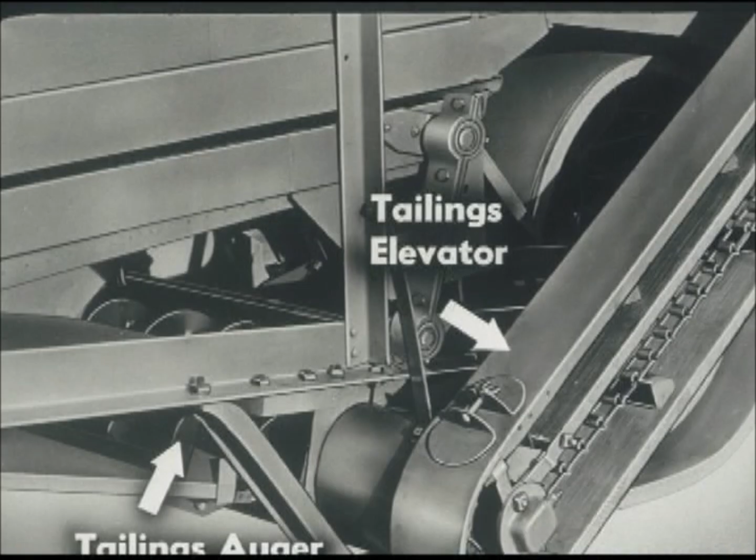Grain heads or tailings from the chaffer extension are carried by an auger and elevator to the cylinder for rethreshing. Clean grain from the sieves is carried by another auger to an elevator and on to bin or bag.

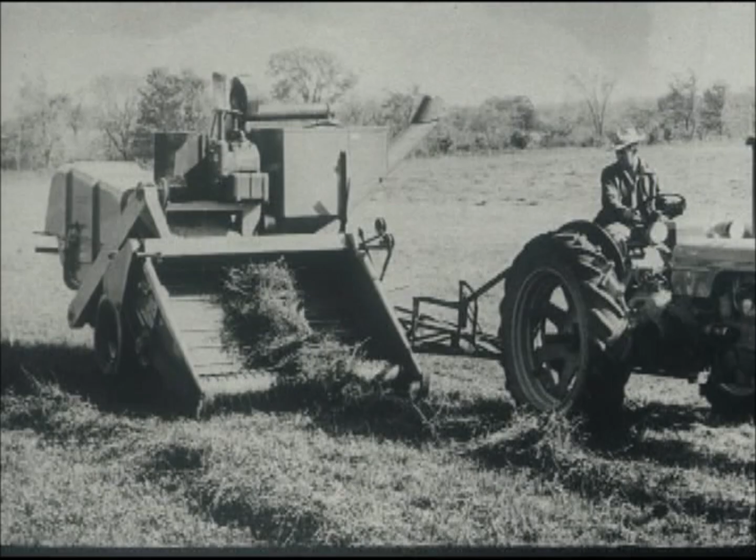The use of special equipment, such as the windrow pickup attachment, provides more efficient harvesting of some crops or more efficient harvesting under unusual conditions. For this combine, special attachments are available to meet virtually every requirement.

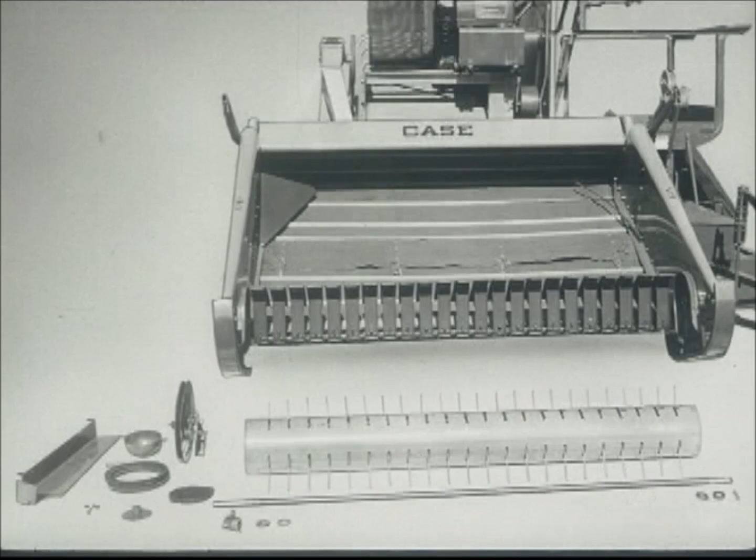The pickup attachment is simple and effective. There are no complicated cams or bearings inside the drum. The stripper assembly is rigidly supported along the whole length of the cutter bar.

The sickle may be operated with the pickup in place to help clear the strippers of trash. A V-belt and roller chain drives the pickup drum.

A safety clutch on the large pulley protects the attachment from breakage. Guards covering the chain and sprockets should always be in place when the pickup is in use. The straw spreader attachment scatters the straw falling from the rear of the straw rack. Tillage operations are handled more easily when straw is evenly distributed over the ground.

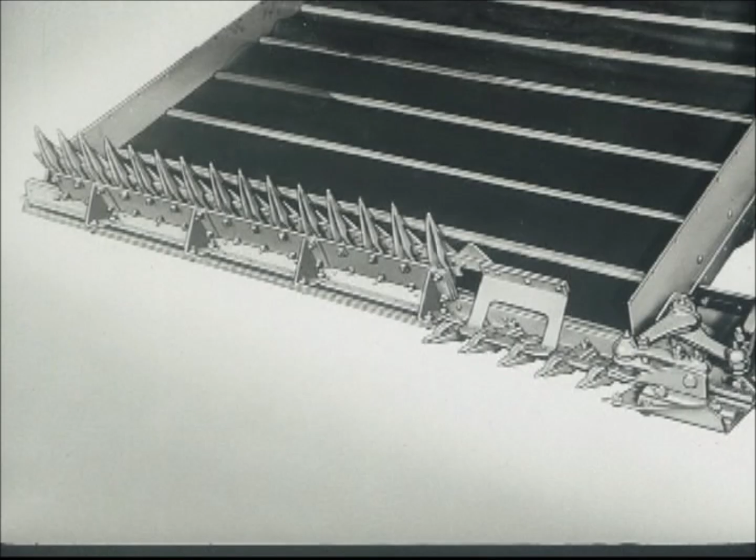The sorghum topper is useful for threshing from the shock. The vertical sickle slices heads evenly from the bundles.

The roto cleaner removes weed seed by allowing it to pass through a screen as the grain is carried across the screen by an auger. This same attachment is sometimes used to separate legume seed, such as vetch, from larger grains, like oats.

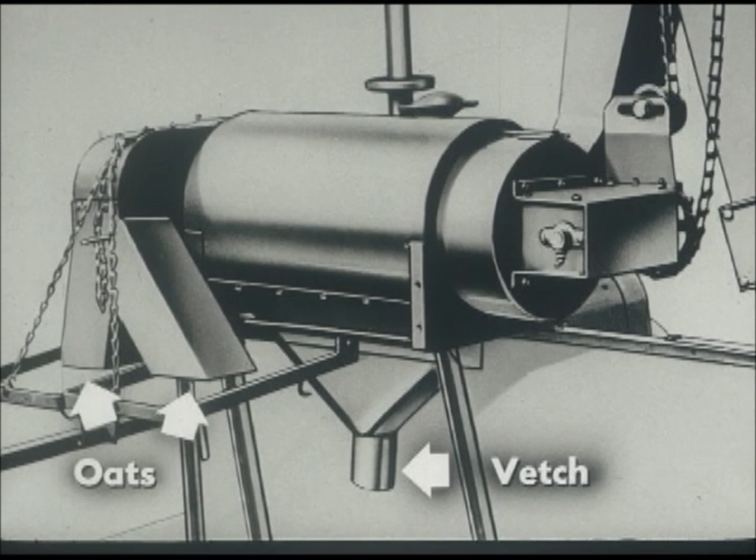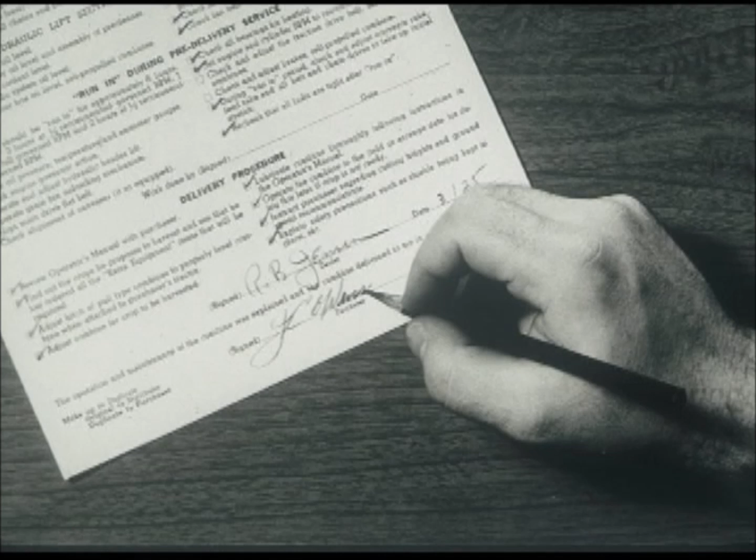Remember the dealer's combine delivery service report. Check and account for each item that applies to the combine you are delivering. When you have completed all the items, sign it, and then have the purchaser sign it too. Give the purchaser his copy, file yours, and send the triplicate to the branch.

Whatever the crop to be handled, a modern combine, such as the one in this film, can be trusted for an efficient, low-cost harvest. But remember, obtaining an outstanding performance record from every combine depends largely on starting each new

combine right. And that means that every new combine must be unloaded carefully, set up correctly, run in at reduced speed, and delivered early to the customer.

And most important, at the beginning of harvest, give the owner thorough instruction in operation, care, and maintenance.

When you do all of these, your customer is going to be proud of his combine and the job it does. And you can be glad you knew the right method for getting your combines from car to customer.